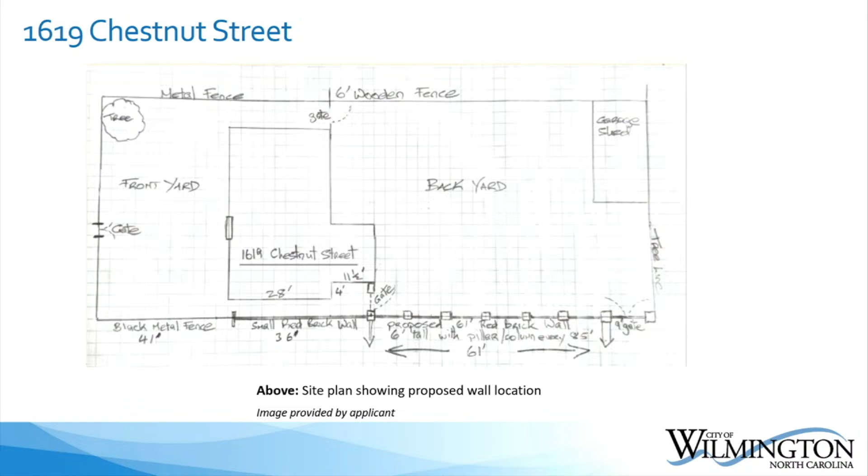So nothing right now? Nothing right now, nothing, correct, for us to evaluate on that north property line. Yeah, okay. The only thing that's going to be in that very corner is a red brick column so we can have the gate basically shut up against that side. Okay. Any other questions, comments? No? Okay, thank you, appreciate it.

If we could hear from anyone in the audience that would like to speak in favor or against this item. Seeing none, I'll close the evidentiary hearing and go to Commissioner deliberation.

Anyone like to make a proposal? I move to approve. Okay, that cool? Yeah. Everyone else have any issues? Okay, so we have a motion to approve as noted in the staff notes here. Is there a second? Second. I'm sorry, will you?

Go ahead, Beth. No problem. I move to approve with conditions the request to install a wall on a corner lot for the property located at 1619 Chestnut Street. This request is consistent with Wilmington design standards for historic districts and landmarks based on the evidence provided, including the application and all attachments, testimony presented during the evidentiary hearing, and the staff report. Is there a second? Second. All in favor? Aye. Motion passes.

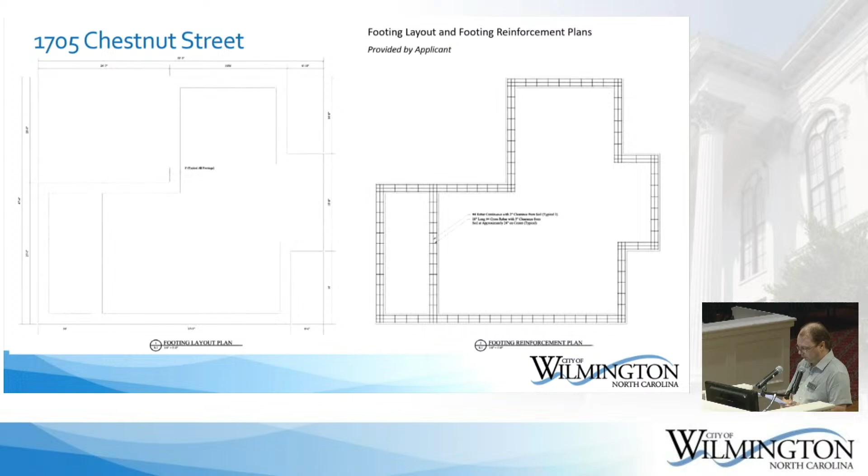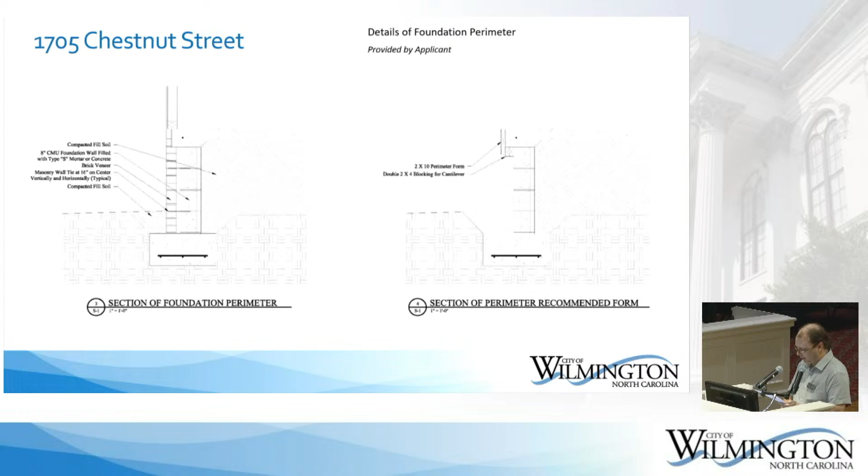Because the house is set approximately 45 feet from the public right-of-way, the most noticeable result of the proposed lifting of the house will likely be the raised front steps, while the rest of the foundation will be obscured by landscaping.

The applicant proposes to replace all the doors and windows on the exterior of the house with Marvin Elevate wood insulated windows with simulated divided light patterns to match the original windows. The proposed wood replacement door will be wood units matching the doors to be replaced. The existing windows along the first floor are 6/6 sash units, while the windows in the dormers are 10 beside 10 double casement windows. The existing front door features an ornate half-light.

The applicant proposes to remove an existing deteriorated stucco chimney that formerly served a boiler from the east side of the rear portion of the house. The main chimneys of the house will be retained and lifted with the dwelling. Only the very top of the stucco chimney requested for removal is visible from the public right-of-way.

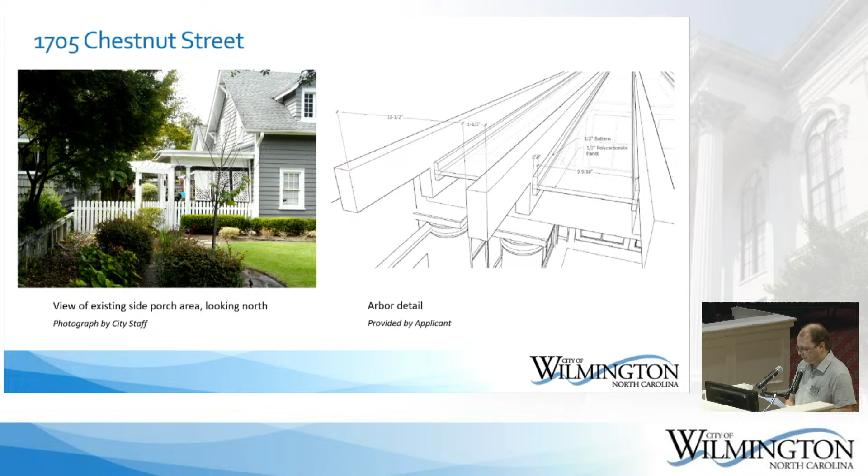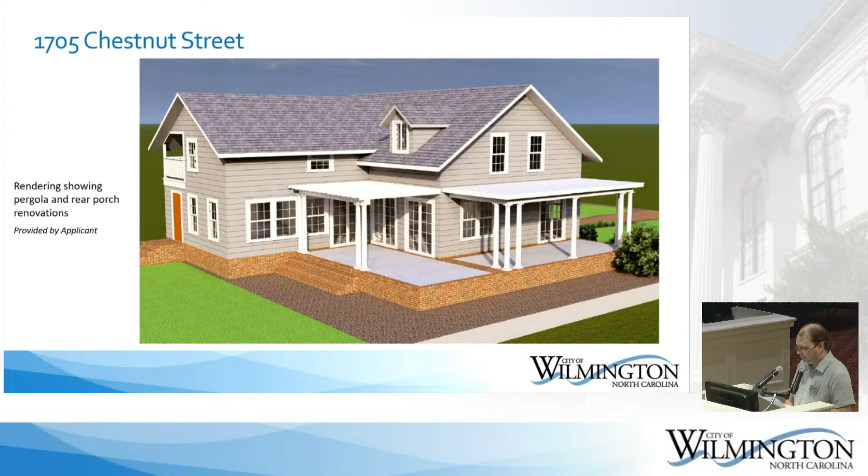Finally, the applicant proposes to install new patios, porch floors, structures, and pergola, and restore the existing siding, trim, and damaged railing and brackets. The front and rear steps will be reconstructed to account for the raised elevation of the dwelling. A covered concrete patio with brick highlights will be located on the side west elevation, while the patio will be covered by a pergola on the rear elevation, and an uncovered portion of the patio on the northwest corner of the house. If approved, staff recommends the following conditions.

All glazing in the replacement doors and windows shall be clear with no tint. No window or door openings shall be altered in size as a result of the project. The new crawl space and foundation shall be properly vented. All construction shall comply with the code, and changes to the project will be reviewed.

Staff would like to enter this presentation and report into tonight's proceedings. Are there any questions?

On condition number 3, the new crawl space and foundation shall be properly vented or sealed to code, correct? They don't have to vent it if they can seal it properly, whatever the proper way of dealing with it is. I was reading the design standards about venting for flood issues, so I'm not 100% sure of the appropriate treatment, but if sealing will work, we can update the code conditions accordingly.

Ben, are the suggested replacement windows the types allowed to be replaced according to our current design standards? They will be simulated divided lights, but the true simulated divided lights, not the snap-in type. Okay, so they'll be the true simulated lights, correct? Gotcha, thank you.

And those Elevate windows are fiberglass exterior, wood interior? Which windows? Marvin Elevate windows, fiberglass exterior and wood interior? I'm not 100% sure on that.

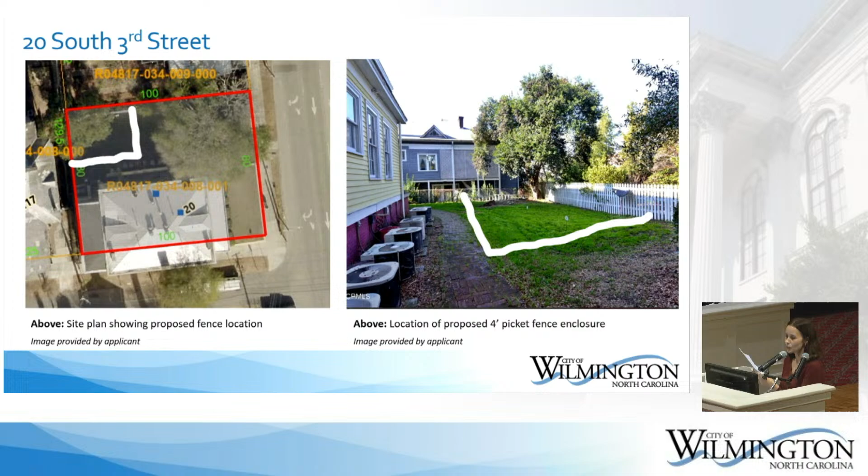If approved, staff recommend the following conditions: the proposed picket fence shall be white wood fencing matching the height of the existing property line fence. The finished side of the fence shall face towards the public right-of-way. Any gates shall not swing out over the public right-of-way or into any neighboring properties, and no mature trees or historic landscaping shall be removed as a result of the proposed project. All construction shall comply with the code, and changes shall be reviewed.

Staff would like to enter the presentation and report into the record of tonight's proceedings. This concludes staff's presentation, and I'm happy to answer any questions you may have. Any questions? No? Thank you, Hillary.

Thank you. Is the applicant present? Not present. Anyone in the audience may want to speak in favor or against? Seeing none, I'll close the evidentiary hearing and move to commissioner deliberation. Would someone like to speak on this? If not, let's make a motion.

I move to approve the request to install a fence on a corner lot for the property located at 20 South 3rd Street. The request is consistent with the Wilmington Design Standards for Historic Districts and Landmarks based on the evidence provided, including the application and all attachments, testimony presented during the evidentiary hearing, and staff reports. Is there a second? Second. All in favor? Aye. Any opposed? That passes.

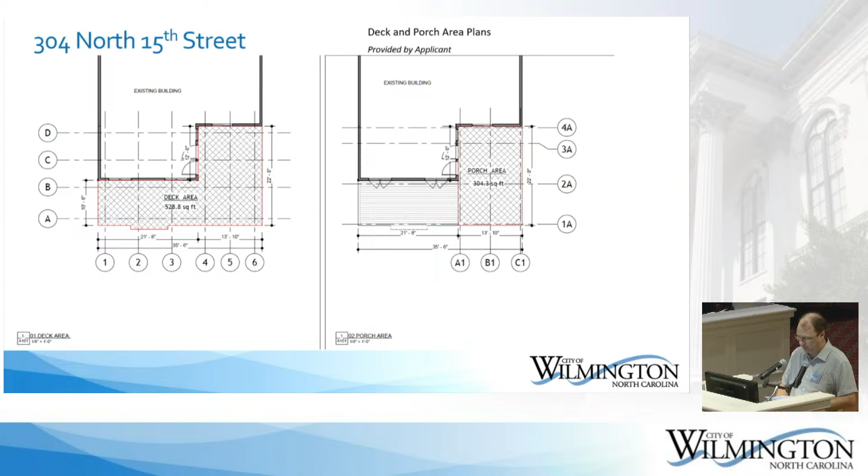The proposed deck and porch will rest on 30-inch by 30-inch by 30-inch concrete footers that will support 2 by 10 headers, with the posts being 6 by 6s and 2 by 8s for the rafters.

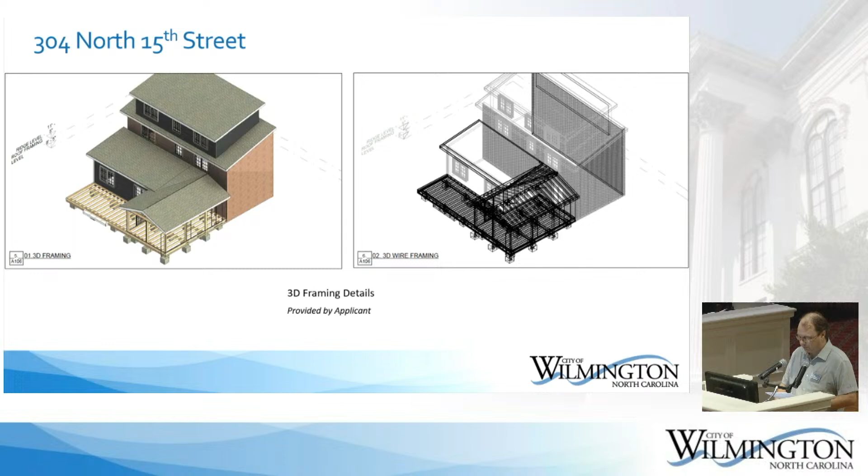The proposed deck will utilize southern yellow pine for trim and siding, with tongue and groove planking for the porch ceiling material, while the decking material will be composite Deckorators Voyage in Costa color. The roof of the porch area will be black architectural shingle matching the existing house.

Because of the location of the proposed deck and screened-in porch area at the rear of the house, only small portions of the side elevation will be visible from the public right-of-way.

If approved, staff recommends the following conditions: no mature trees or historic landscaping shall be removed as a result of this proposed project, all construction shall comply with the code, and changes to the project shall be reviewed. Staff would like to enter the presentation and report into tonight's record of the proceedings.

Are there any questions of Ben? No? Okay, thank you. Is the applicant in attendance? If you can come forward, please. State your name, address, and just adjust the microphone if you need to.

My name is Alyssa Thompson, and I live at 304 North 15th Street. Would you like to add anything?

No, we're looking to enhance our backyard. We do have a fence, so even the very little part that you can see from any right-of-way, even from the neighbor's property, is only what would be above the fence line up to the roof. The rest wouldn't be visible at all from the road. Our goal with the project is to enhance our backyard, increase the value of the house, and have an exterior living space.

And all of the materials that we've chosen, including the composite decking, are meant to match the existing — it looks like real wood. The colors that we are using for the siding were to match the siding on the back of their house, which is like a brown color, but the whole thing is designed to match the current existing colors of the home.

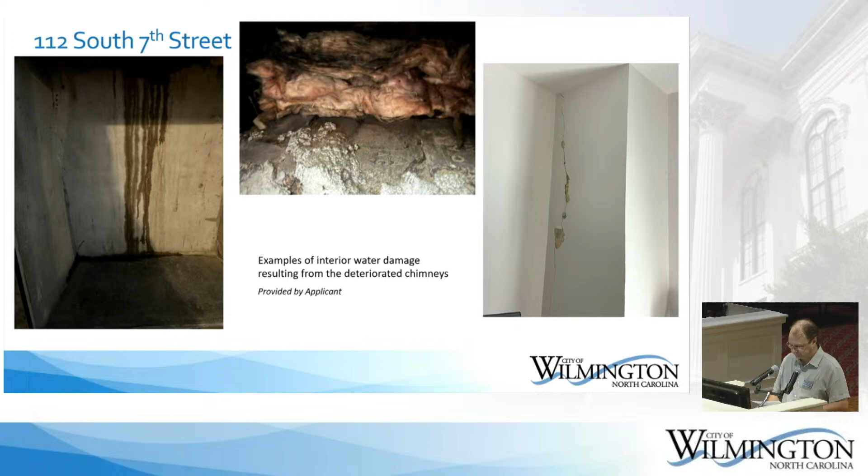The interior portions of the chimneys will be retained. Because of the substantial deterioration of the chimneys, active water intrusion is occurring, resulting in interior damage and problematic mold issues. The chimney on the south slope of the roof is more visible than the chimney at the rear of the house from the public right-of-way.

The more prominent chimney features a corbelled crown with a raised flat chimney cover, while the rear chimney is a simple rectangular chimney with a stucco finish and a flat metal chimney cap. Both of the existing chimneys are noticeably deteriorated.

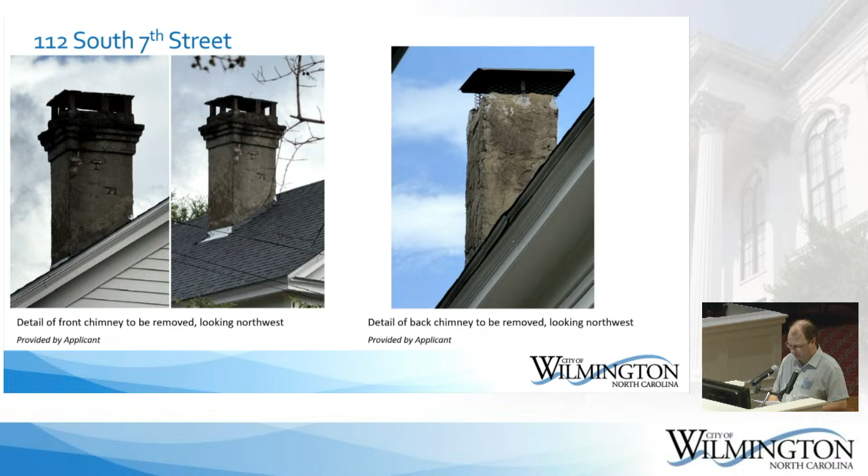The existing chimney stacks will be removed, the roof penetrations infilled, and then Owens Corning Estate gray shingles matching the existing roof will be installed to properly seal the roof against further water intrusion.

If approved, staff recommends the following conditions: all materials removed from the house shall be properly disposed of; the former chimney penetrations shall be properly infilled and sheathed in Owens Corning Estate gray shingles to match the existing roof; all construction shall comply with regulations and code, and changes to the project will be reviewed.

Staff would like to enter this presentation and report into tonight's records of the proceedings. Are there any questions?

Any comments on this? Okay, thank you. Is the applicant in attendance? If you could come forward and answer any questions or provide clarification, please state your name and address and speak into the microphone.

Hi, Megan Bond, 112 South 7th Street. Thank you for your time. The only other context I wanted to provide is that we bought this home in 2020. It was in various states of exterior disrepair, and the interior was full of very bad DIY jobs and builder-grade updates that were completely historically inaccurate. So we've spent the better part of the last 5 years doing updates to restore the home, preserve details where we could, and spent a lot of time, resources, and money to do that.

When we started having this water intrusion issue with the chimneys, we called several people. We got an interior chimney inspection, and we had multiple roofers come out to look at it. Our goal was to repair the chimneys—that's what we were hoping we could do, and that's what we asked for quotes for.

My understanding is that the $12,000 cost is effectively the masonry cost to rebuild that brick, and if we were going to do it, they would use brick. It looks like that front chimney was maybe all brick at one point, but as you can see, most of it now looks like it's been parged over. So that's my understanding, but I'd have to go back to their quote for specifics on how they were proposing to do that.

Okay, well, thank you.

Which building are you referring to? I don't know the address, it's right across the street. Residential, or where the coin shop is on Chestnut, the blue one, right by Savorez, right across the street from Savorez. Is it residential? No, it's commercial.

It was an after-the-fact situation years ago. They removed both chimneys, and then the city found out about it, and they were made to put up these faux chimneys. But the roof is completed and sealed, they just put these back for the look. I'm not saying we did it, I'm just saying that's something that's been done in the city.

If you demolish this chimney, are you demolishing it to the crawl space or just below the roof deck? No, we'd just be cutting at the roof line, so we're maintaining all the fireplaces. One of our goals is actually to restore the fireplaces, which have been patched over with weird 90s tile. So our hope is to restore those on the inside. We'd keep the chimney through the attic all the way down to the crawl space, it would just be removed at the roof line.

So there's no framing right now to repair all around this, the two floors? No, we did an interior renovation before we moved in and water intrusion wasn't an issue at that point. Then we recently did an exterior renovation, and we were told at one point that contractor was going to deal with this as part of that, but that didn't happen, so that's why we've come back to this separately.

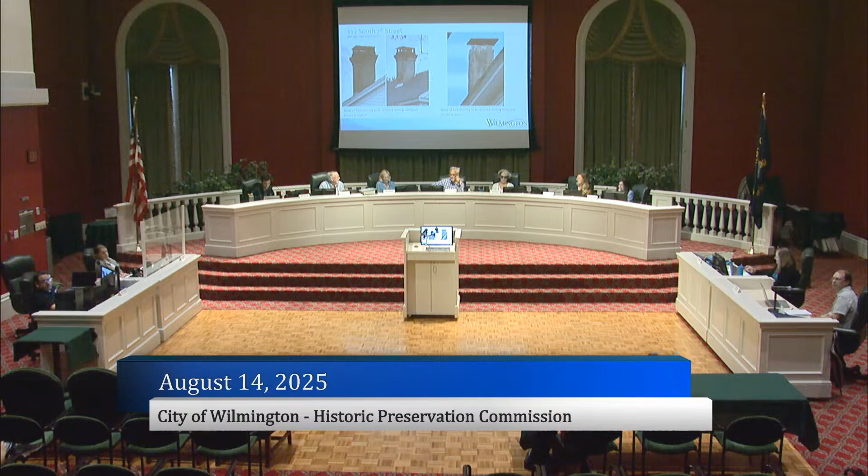If there's anyone else in the audience that would like to speak in favor or against, seeing none, we move to commissioner deliberation. We already did, yeah, we kind of got through all of that.

I've rebuilt a bunch of chimneys like this. It can be done. I think if we let that rear utility chimney go and invest some effort into this one, rebuild it properly and flash it properly, I would like to see the chimney remain, but I'm probably in the minority, and that's fine.

Someone like to make a motion? Not remain, but be rebuilt.

The way they have these bricks standing up on the top, on their end, with a cap over it, is the worst functional design you can employ there. The other ones we've done like this, we've actually taken the chimney back down below the roof line, get to good mortar, good brick, rebuild it back, have that corbelling, and then put a cap over it—stainless or copper—and not have that effect, because that's where the water is getting in and causing the issue. That's the problem with it, that's where it started, with that design at the top.

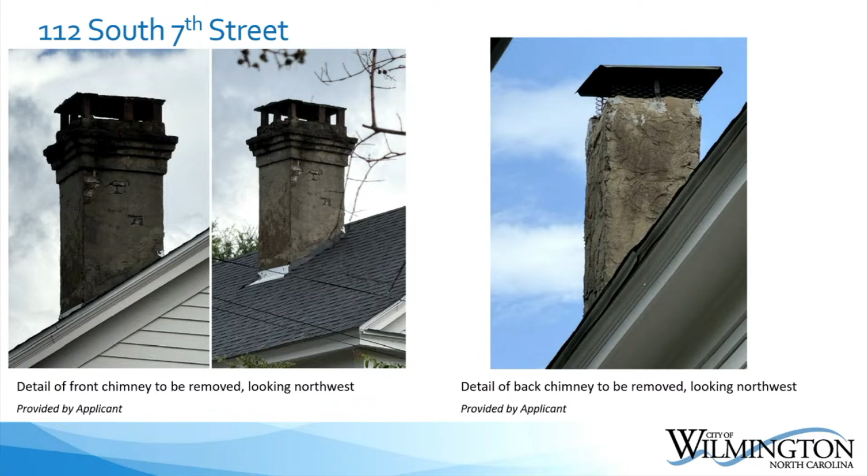So I would recommend rebuilding it and putting a cap on it, and then you've got a good chimney. And even if it's been infilled with concrete, you can get some coal basket things in there and put a liner down and have some gas logs or something like that in there. But that's my piece. Would someone like to make a motion?

I'd like to move to approve with conditions the request to remove 2 chimneys for the property located at 112 South 7th. This request is consistent with Wilmington design standards for historic districts and landmarks, based on the evidence provided, including the application, all attachments, testimony presented during the evidentiary hearing, and the staff report.

Second. All in favor? Aye. Any opposed? Negative. That passes. Thank you.

1403 Market Street, item 8. Case number 8 is a request for site redesign, fence installation, and sign replacement at 1403 Market Street.

Trinity United Methodist Church, located at 1403 Market Street, was initially constructed circa 1921 and is a contributing resource to the Carolina Heights Winoca Terrace Historic District overlay. As such, only that which can be seen from the public right-of-way, excluding alleys, is subject to design review. The subject property is located on the northeast corner of the Market Street and North 14th Street intersection.

On the left is an aerial image of the existing site, and on the right, a site plan provided by the applicant depicting the proposed alterations.

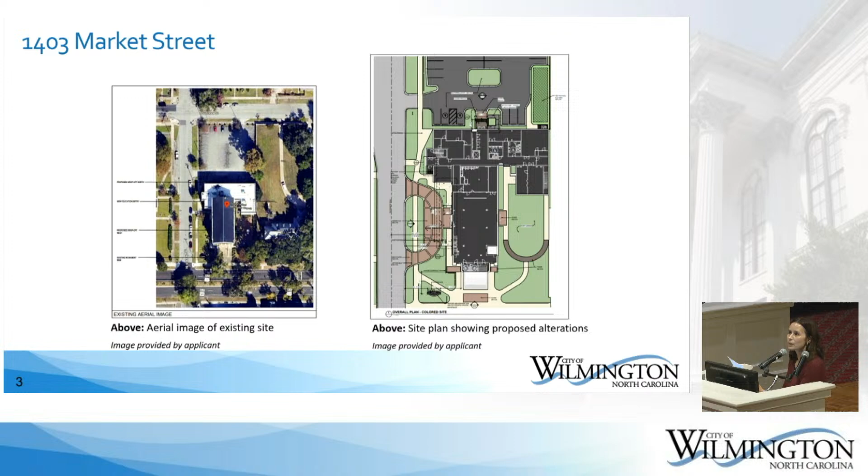As depicted on the site plan, the applicant proposes to install enhanced permeable paving at existing and proposed entryways. The top left photo displays the location of the proposed permeable paving at the foot of the grand staircase on the front, or south elevation, of the church building. The bottom left photo displays the location at the rear, or north elevation, of the two-story education building at the rear of the church building, which I'll refer to as the addition building hereafter. The two photos to the right display the locations at the east and west side elevations of the church building.

The proposed permeable pavement will be constructed with clay pavers to match the church facade in color and style. And just as a note, an east side entry door is depicted in the site plan, but is not proposed in the application narrative. These are the proposed and alternative permeable paving materials.

The applicant proposes to modify landscaping within the existing lawn area located at the east side of the church building. As depicted on the site plan, a formal event garden will be created to replace the existing lawn, featuring a horseshoe-shaped paved pedestrian path constructed with clay pavers to match the building's historic brick facade. An entryway lawn, located to the south of the event garden, will feature a concrete pedestrian path leading from the sidewalk right-of-way on Market Street into the event garden.

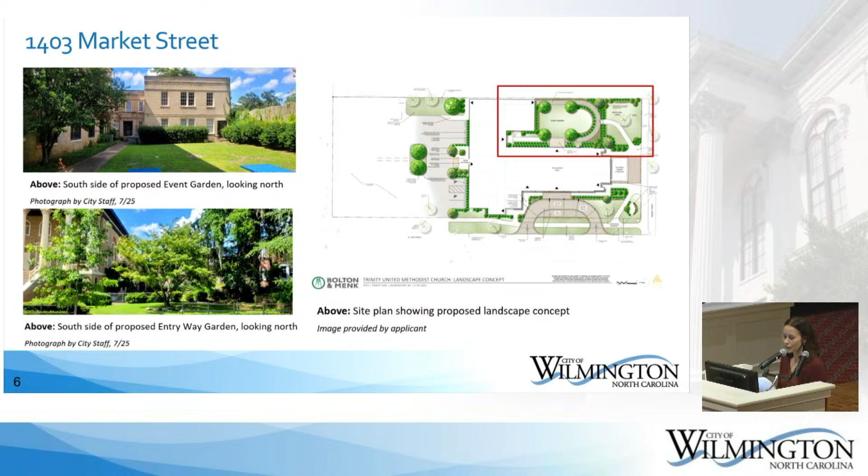The applicant proposes to install a 4-foot picket fence delineating the entryway lawn from the sidewalk right-of-way along Market Street. The proposed picket fence will feature intricate detailing and a black finish compatible with neoclassical revival style architecture, as shown in the example on the right.

The applicant proposes to add a horseshoe-shaped entry circle with 2 driveway aprons for vehicular access at the west side of the church building, as shown in the rendering on the right.

The entry circle will be paved with driveway-approved pavers to match the existing church facade, and if feasible, pervious pavers like those shown on the right will be used to support on-site stormwater management.

The project is currently undergoing review by the Technical Review Committee, and if alternative driveway and paving materials are adopted based on TRC recommendations, staff recommends that these will be reviewed through the administrative bypass process.

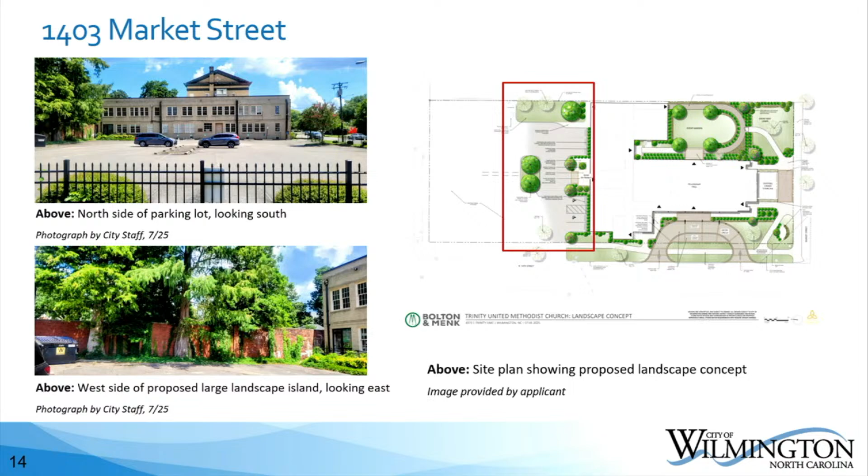And finally, the applicant proposes to reconfigure the existing parking lot at the rear, or north, of the addition building. Parking spaces will be moved slightly further from the building than the existing spaces. New foundation plantings will be installed along the building's rear elevation, and concrete curbs and wheel stops will be introduced to protect planting beds, pedestrian paths, and the accessible ramp. Two new curb landscape islands are proposed within the parking lot—one north of the new entry porch with new shade trees, and the other near the existing trees at the east end of the parking lot to expand open space.

If approved, staff recommend the following conditions. Right-of-way and driveway permits will be required prior to construction of the driveway. The proposed entry circle drive shall be constructed with driveway-approved pavers to match the existing building facade in style and color, using permeable paving materials where feasible.

The canopies shall be compatible with the existing building in style. The proposed canopy shall maintain a clear height of 9 feet as measured from the sidewalk surface to the bottom of the canopy, and shall extend no more than 12 feet beyond the building's facade. The proposed gutters and downspouts shall be painted bronze to match existing building accents, and the proposed windows and entry doors shall be painted bronze and compatible with the existing building in style and color.

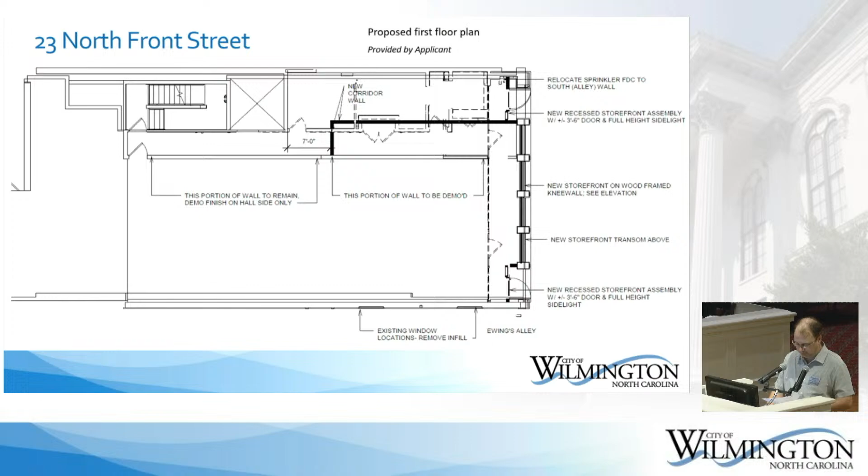The applicant is proposing to remove the non-original inset storefront and entry doors on the first floor of the front east elevation, and to reconstruct a new storefront with transom between the existing pilasters on the front east elevation, similar to the earlier storefront configuration shown in the historic photos.

The same general dimensions and datum lines will be used for the transom and glazing.

On the south end of the front elevation, a new recessed entry will be constructed for first floor tenant access, while the recessed entry to the basement, second floor, and third floor tenants will be through the recessed entry on the north side of the front elevation.

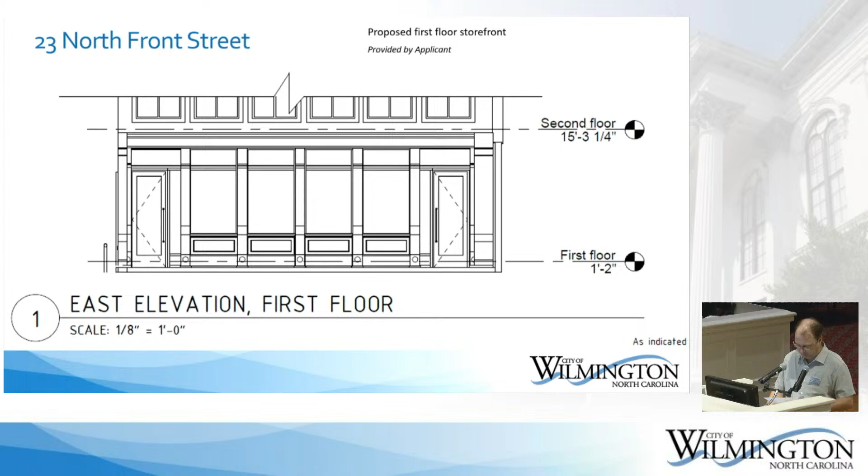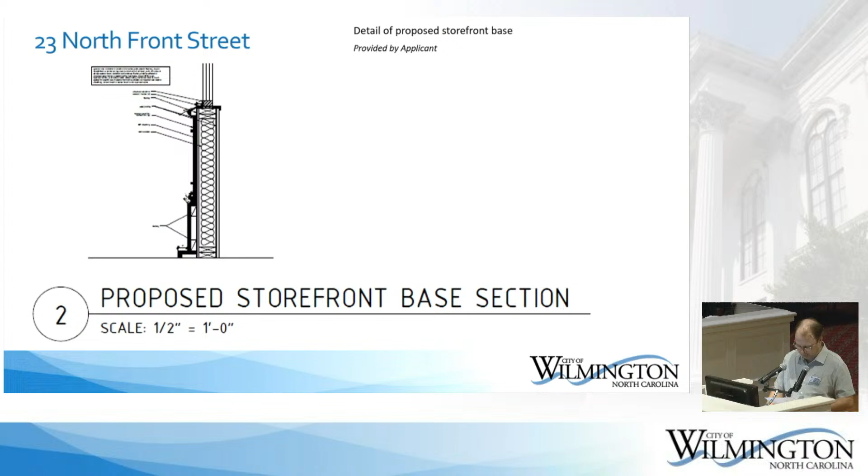The new doors will meet code requirements and be approximately the same height as those shown in historic photographs. A new framed bulkhead with wood paneling will be installed below the new storefront glazing between each existing pilaster.

The applicant proposes to install a new storefront glazing system. The storefront glazing system will be a Cortizo alu steel system in a classic profile with clear glazing, and it will include transom windows.

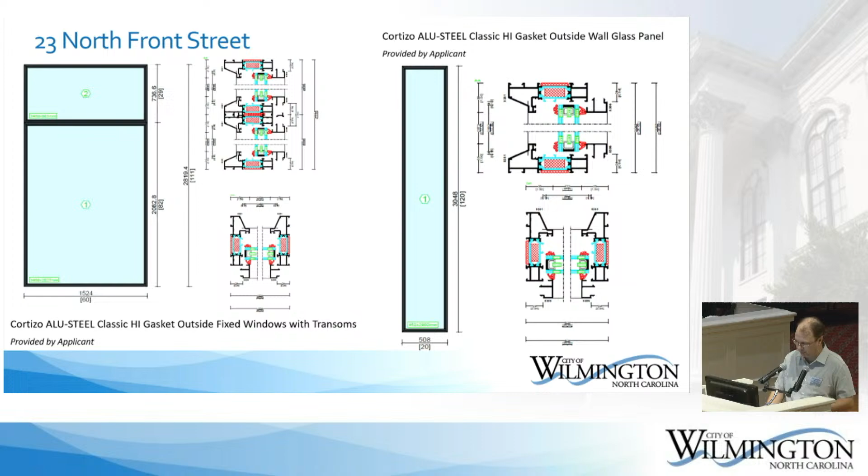Staff note that the applicant has withdrawn the rear portion of the project that was included in the submitted materials and will submit that portion of the project at a later time.

If approved, staff recommends the following conditions: the proposed replacement windows will be clear with no tint; the new storefront system shall be installed in a manner that will result in no damage to the existing iron pilasters; all construction shall comply with code, and changes to the proposed project shall be reviewed. Staff would like to enter the presentation and report into the record of tonight's proceedings.